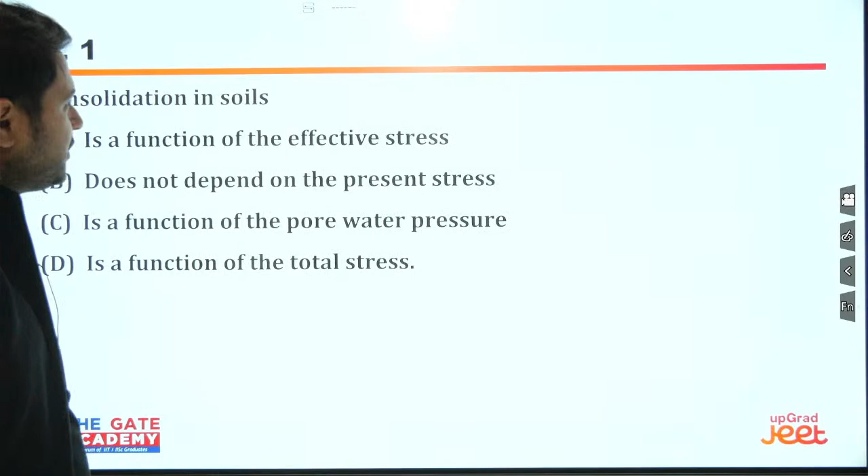Okay, let us enter into the first question of the day. Are you ready, everyone? So I'm going to start this right away. The first question of the day is on your screen now. Try to solve it, everyone.

Don't worry, I'll give you a solution for that also.

Today I'll be telling you which questions you should apply to improve your rank. After this question only, I'm going to tell you, so apply this question first.

Anyone with the answer? Islam, your answer is wrong. Pradyumna, very good. Vivek Raj, your answer is again wrong. Pradyumna was my student, I remember. Those who have studied the subject conceptually will be able to answer it very clearly. I mentioned these notes separately in your class notes. Anyways, who is it? Shri Nandana.

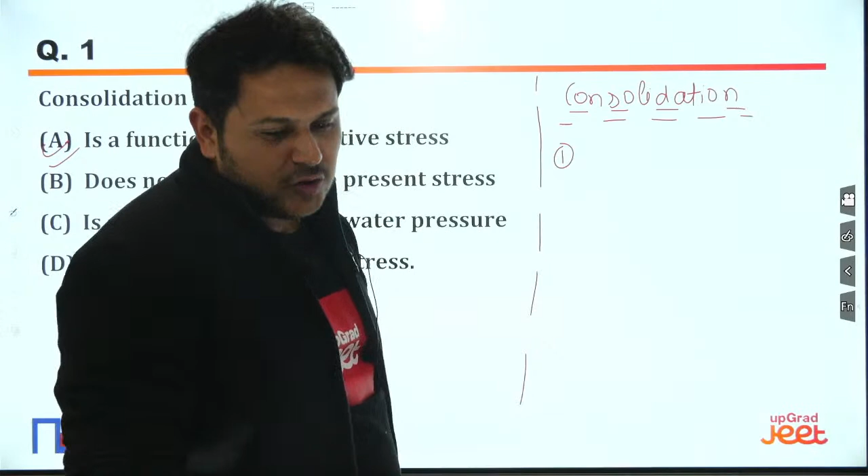Number one, consolidation is compression of the soil. Can I say that consolidation is the compression of soil? You people just type yes or no. If you agree with me, type yes. If you disagree, type no, and then I will explain that particular thing.

Very good. Now Chetu is typing that it is the reduction of weight. I can simply write that it is decrease in volume of soil. This is the second thing.

Now, what is the third thing? Compression of the soil, decrease in volume of the soil. And how is this decrease in volume of soil occurring? Escape of pore water.

But please mind my words. Each of these points is going to get converted into questions of different states, engineering services exams, or GATE. Every point is being asked as a question, so you have to be very serious while writing these points.

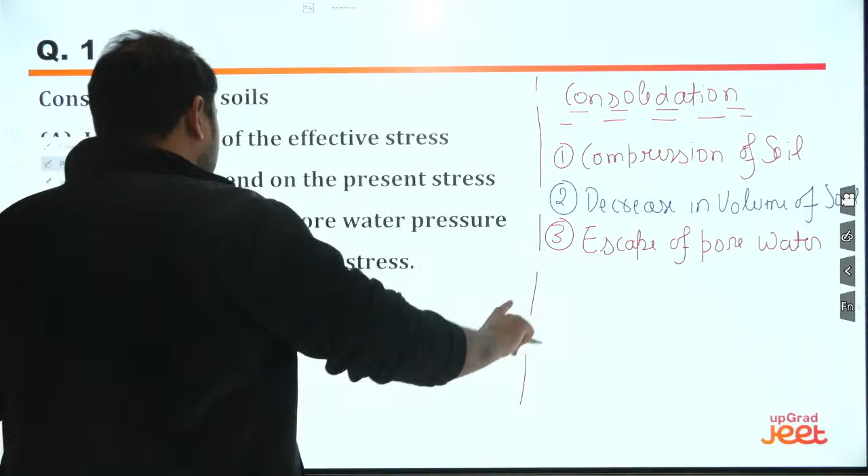Now fourth: if the pore water is escaped, will the effective stresses increase or decrease? The very first thing is, what is the meaning of effective stresses here? It is the stresses between the grains.

Stresses between the grains. Now, whatever are the stresses between the grains, if I have removed the pore water from it, will this effective stress increase or decrease? Tell me, everyone. This increases. So effective stresses increases.

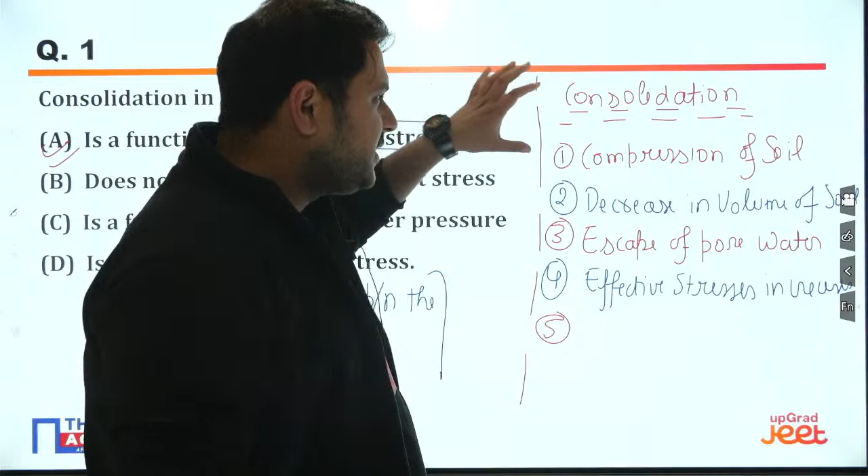So I can write here: effective stresses increases. Now if the effective stresses are increasing, what will happen next? The fifth point of consideration: compression of soil, decrease in volume, escape of pore water, effective stresses increases.

Now, this consolidation phenomena is nothing but a volume reduction phenomena. How is the volume reducing? Particles are coming close to each other. How? I'll tell you.

Suppose, please understand, these are the two particles. This is your one particle, this is your second particle. They were forming together the soil.

Earlier, the space between them, or the void between them, had the water. Once the water is eliminated, they will come close to each other. Why? Because the effective stresses have increased. Why? Because the pore water has escaped. Why? Because there is a decrease in the volume.

Decrease in volume automatically means that they are coming close to each other. Yes or no? Yes, sir. If they are coming close to each other, and if the effective stresses are increasing, from here let us see the options now.

Option one: consolidation in soils is a function of effective stresses. Number two: does not depend on the present stresses. It depends on the present stresses.

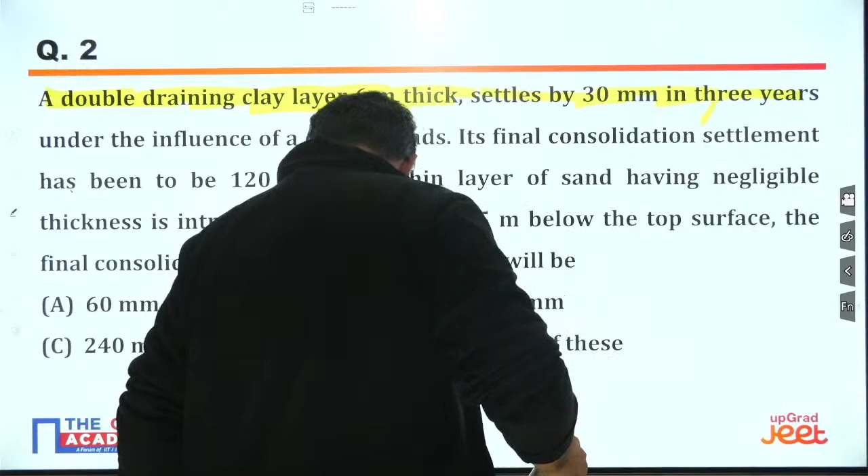A double draining clay layer, 6 meter thick - I will repeat it - settles by 30 mm in 3 years under the influence of a certain load. Its final consolidation settlement has been found to be 120 mm.

If a thin layer of sand having negligible thickness is introduced at a depth of 1.5 meter below the top surface, the final consolidation settlement of the clay layer will be? So this is the question. Anyone with the answer?

Anyone with the answer? Mayank, very good. Mayank has given the answer. Okay, very good Mayank, I appreciate that at least you tried it.

Now I'll give you an example of it. I'll make the diagram and explain it to you. Don't worry, I know some of you are beginners and need conceptual clarity. He is saying there is a clay layer of 6 meter thickness. This is case number 1.

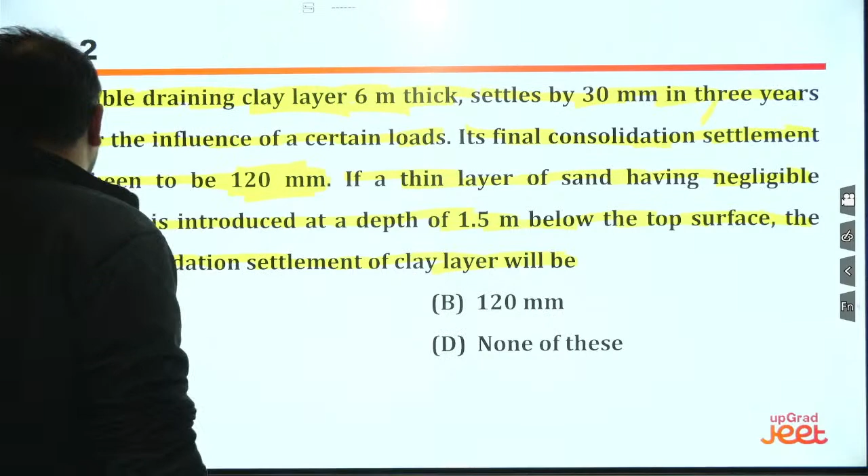In case number 2, what did he do? He introduced a thin layer of sand having negligible thickness at a depth of 1.5 meter. Now what will we do? We will take the same sample. Total was 6 meter, right?

After a depth of 1.5 meter, we introduced a very thin layer. Now what will be the depth left below it? This is going to be 6 minus 1.5, that is 4.5. Though this doesn't look like 4.5, you will have to assume this is 4.5 meter. Very good Pradyumna, very good.

So seeing the diagram, you are able to solve it now. Now please understand, I will give you one statement and things will be clear to you. The final consolidation settlement depends upon the total thickness.

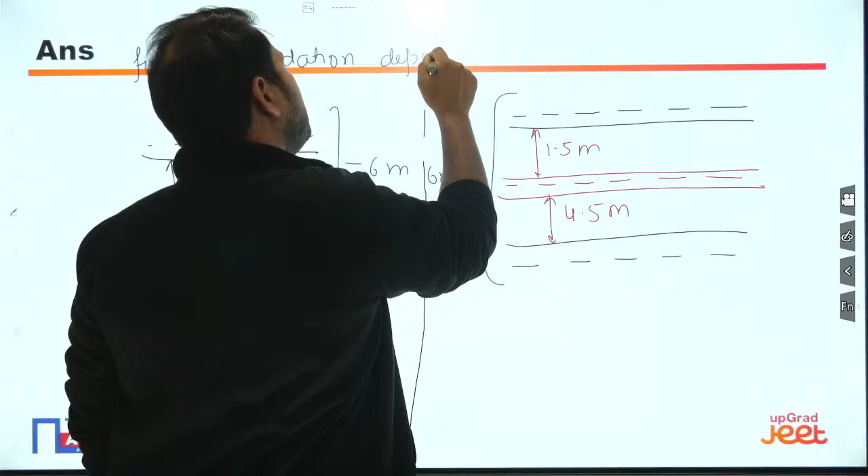Total thickness for this is 6 meter. The final consolidation settlement depends on total thickness. Now if we are inserting a negligible thickness layer in between, are we changing the total thickness? No, we are not changing the total thickness. Since we are not changing the total thickness, we are not changing the final consolidation settlement.

So the final consolidation settlement in this case was 120 mm. So in this case also, it will be 120 mm. So where is the answer? The answer is this only. Is it clear to everyone?

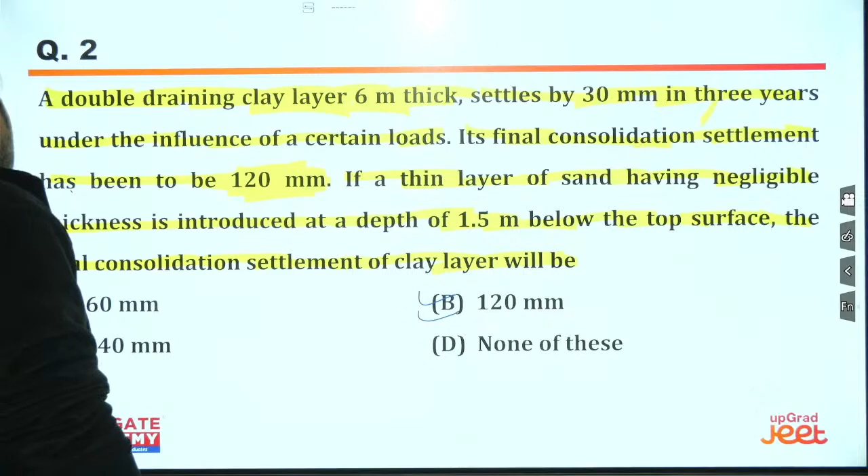Now let us discuss it more. What changes can we make to this question? He can ask you: which of these has more rate of getting drained? That means which of these two specimens will get drained quickly - the rate of drainage. So you will have to understand first how these two samples are different.

Thickness is same in both. So what is different here in these two samples? If the thickness is same, what is different? The difference here is in the drainage path. They differ from each other by the drainage path.

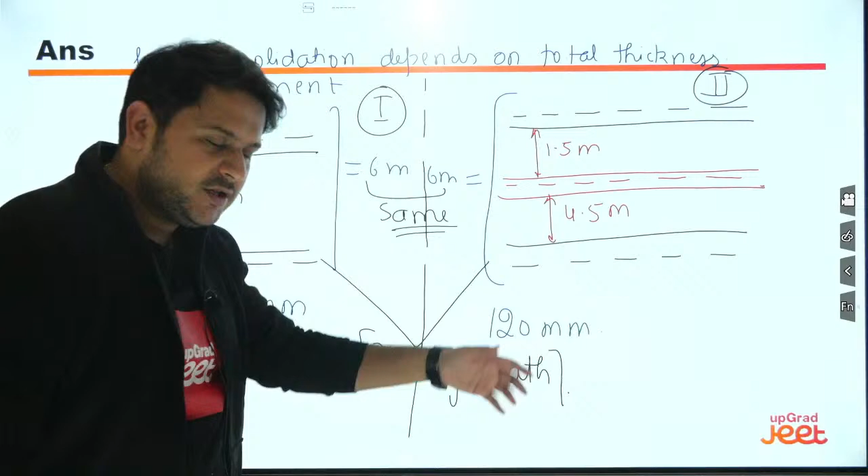Now you tell me, if this is your first specimen and this is your second specimen, which of the following has more drainage path? Please tell me, one or two? Very good, Islam, very good.

Which of them has more drainage path? Tell me. Very good, all of you. So it has more drainage path. Since the second has less drainage path, the rate of drainage is quick in the second one. Is that clear to everyone? Is this entire scenario clear to everyone?

Will you be able to apply such questions in the future, everyone? Tell me.

All right, very good. Now let us move to the question number 3 of the day. We have done 2 questions of the day.

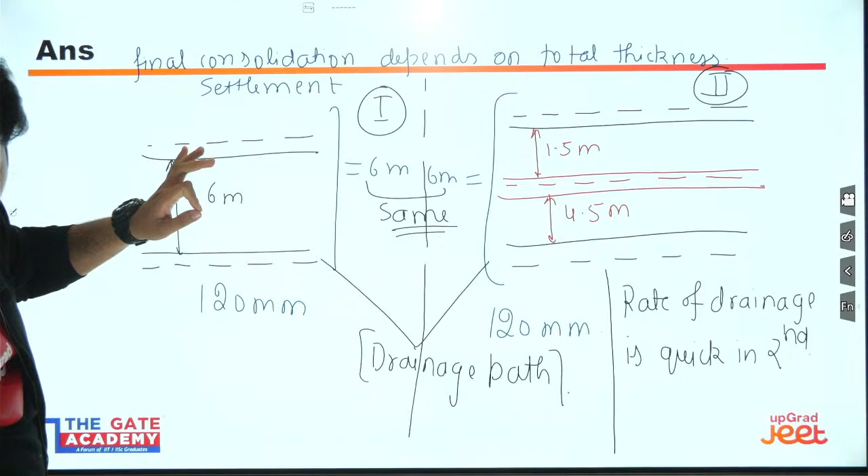Please ensure it. Nilesh Sahu wants to ask how many times. Nilesh, we will cover, and Pradyumna, for you also we have a different question. I have chosen the questions in such a way that we are starting from the beginning and the concepts will keep on piling up. So the next doubt or question will be covering all your doubts. I will suggest you people to have patience for the next few minutes so you will be able to understand whatever your doubts are. So let us enter into question number 3 and cover all your doubts.

Pradyumna and Sahu, all right Prachi. Just see the question number 3. This is the question number 3. Questions will be coming which will be covering your doubts. Bache, Nilesh, I have seen Johan, I have seen your doubt, and Islam, I remember your doubt also, bache. So let us keep moving because there is no point of wasting time here, since the same thing has to be covered in the future also, right?

Let us move to the next question. This is the next question. Please try to answer this question, everyone.

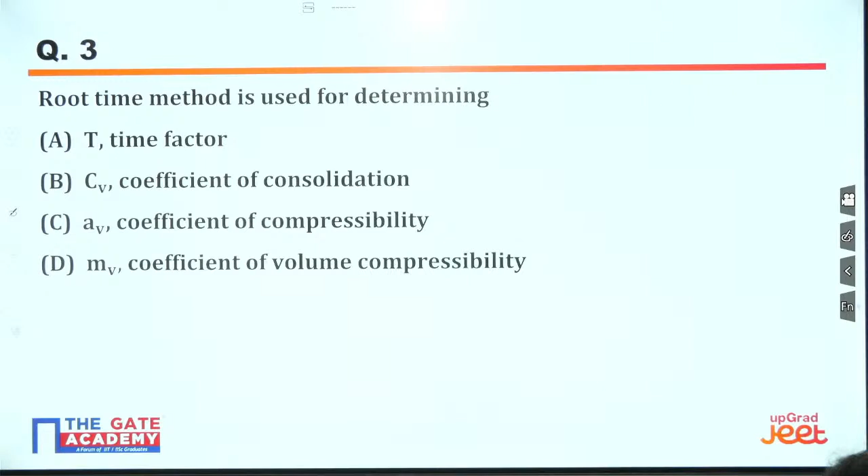All right, all right, all right. I have given enough time for this question. Now let us start answering this question, okay? What does it mean? I'm coming for it.

Very good. All of you have given the right answer, I guess. Now please answer: the curve fitting methods are used to find what? Which methods are used, curve fitting methods? I'll give some additional theory to you people, those who are beginners. Curve fitting methods are best suited, used to find the coefficient of consolidation, right?

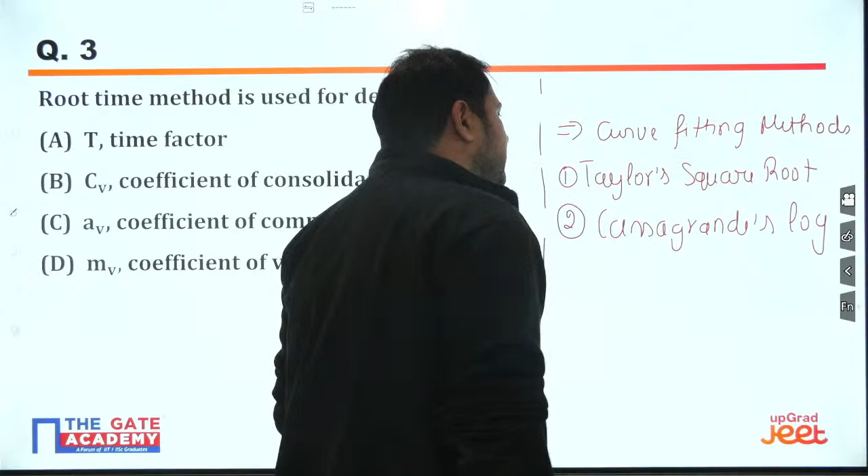They are used. What are the two curve fitting methods? Anyone? The two curve fitting methods are Taylor's square root of time method and the second method is Casagrande's logarithmic of time method. So these two are the curve fitting methods which are used for the consolidation coefficient, right?

Okay, shall we proceed to the next question, everyone? So what is the right answer to this question? All of you have given the right answer. This is just a basic question which everyone knows, okay? Now this is the answer.

See the next question, this is the next question. Please answer it very carefully, everyone. This is the most conceptual question. You should be answering it very quickly, everyone. All of you here, come on.

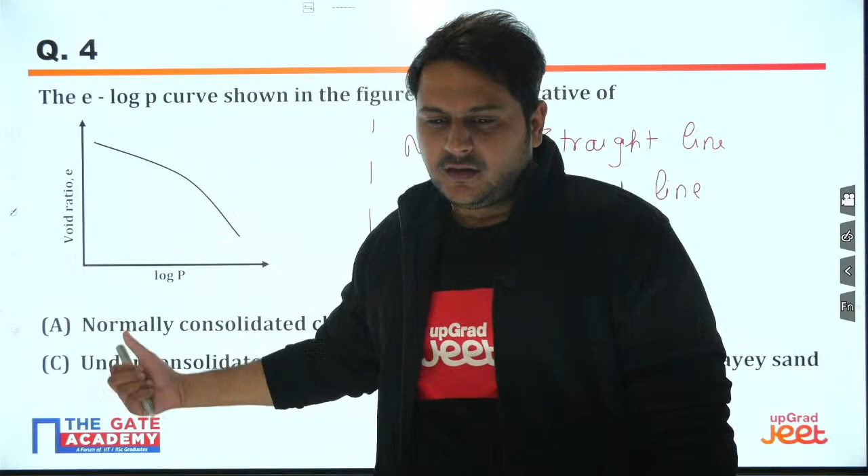Right, I'm starting it. Very good. See, if it is normally consolidated, there are two types of curves. I'll write here only. If it is a normally consolidated clay, it will be a straight line. If it is an over consolidated clay, it will be a curved line, it will be a curve. So this is the entire scenario of normally consolidated clay and over consolidated clay. So here this curve belongs to the over consolidated clay.

Clear? Let us move to the next question. This is the next question, tell me quickly. Take your time and tell me the answer.

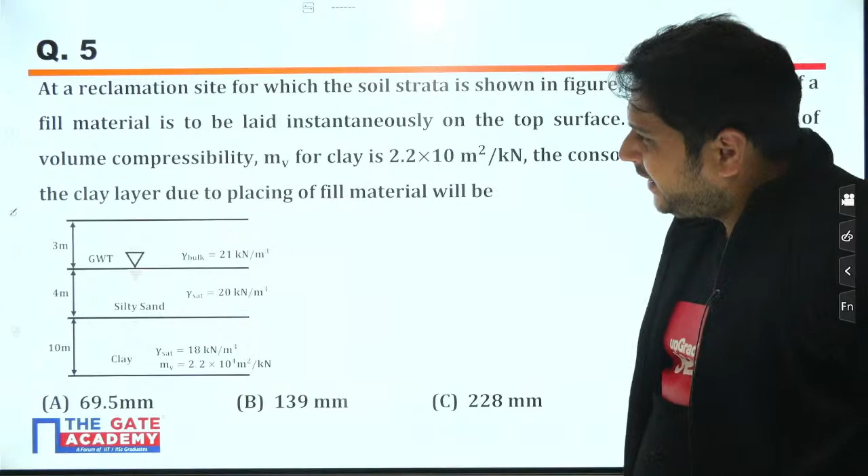Tell me something, everyone. This entire fill, we gave a name to this fill. Now this entire fill will act as what? We used a particular term for this. The fill will act like a surcharge.

Now, after giving this hint, I will just read the question for you once. At a reclamation site for which the soil strata is shown in the figure, a 3 meter thick layer of fill material is to be laid instantaneously on the top surface. If the coefficient of volume compressibility MV for clay is given, the consolidation settlement of the clay layer due to placing of filling material will be?

Now, what they have done, they have put this layer. This layer will act as what? This layer will act as a surcharge. So the fill material or fill weight will act like a surcharge.

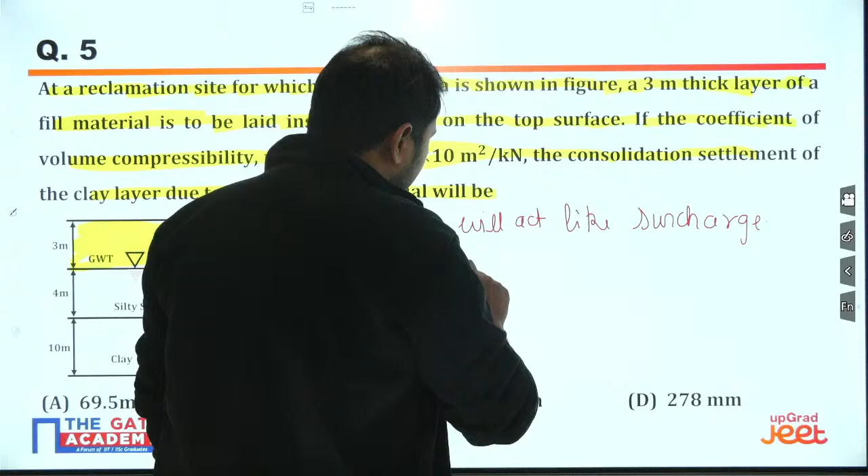So surcharge value Q will be equal to what? 3 meter into 21. So what is the value coming out to be? This value will come out to be 63 kilopascal.

63 kilopascal. Now the next step in this question, you have calculated the surcharge already. So what is he asking you? He is asking the consolidation settlement of the clay layer due to the placing of this fill material. So what would be the consolidation settlement of this clay layer?

So what is the formula to be used? We have to calculate the settlement. Now the settlement can be calculated by a very simple formula, that is MV into H into, there are just three parameters used for the calculation. What are the three parameters? Next is delta sigma should also be there. So put the values, all the values are given to you.

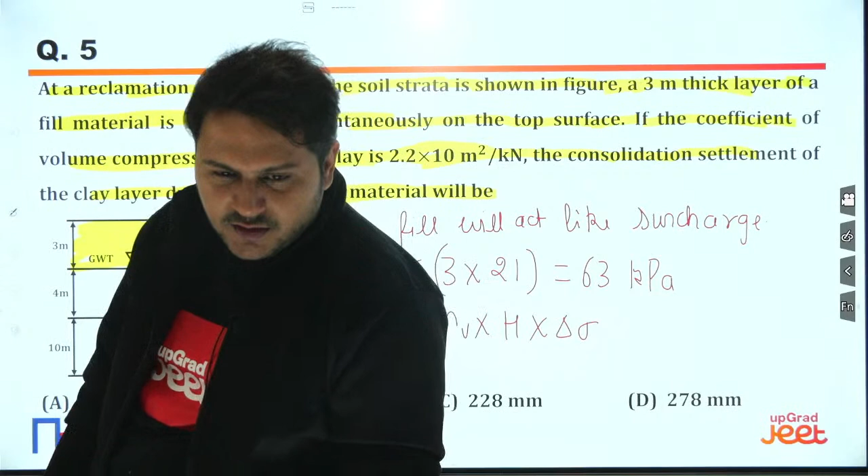Sir, senior section engineer exam... but I cannot comment on this. We are here to apply these questions for the GATE exam. So this session is dedicated for GATE. So just solve these questions.

So value of MV is 2.2. Units you can focus on, what are the units? So what is the value of H? Which H has to be considered? H naught has to be considered. So what is the value of H naught? Who's going to tell me? The value of H naught is 10. So this value of H naught is 10 into...

Now unit conversion also you have to take care of. Now this delta sigma has come out as 63, into 10 raised to power minus 4. What is the answer coming out to be? Tell me. You have written everything, all the data you have. So, very good Islam, this is going to be 10 only.

So this is 138.6 mm. Very good. So what is the nearest answer to 138.6 mm? The nearest answer is B. I hope this question is clear to everyone now.

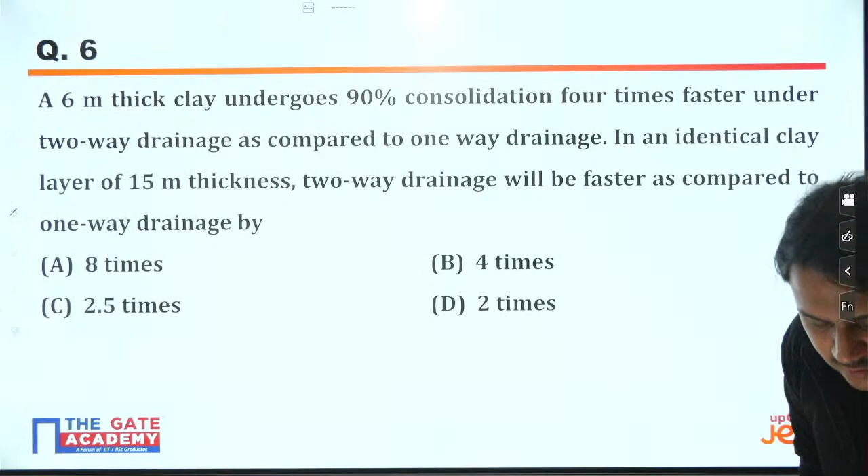Proceeding further, okay, the next question for you is this. Now, someone asked me how much time faster it is, if thickness is this, if thickness is that. Now this question will make the clarity over it. Whose doubt was it? Johan, you asked this doubt, Pradyumna, or someone else asked this doubt? So that doubt will be covered here.

No, Pradyumna, H naught will be the thickness whose consolidation is asked. The consolidation of this layer only has been asked. So what is the initial thickness in your words? If you want to call it the initial thickness, this is only the initial thickness, no? Or this is the thickness whose consolidation settlement has to be considered. So we will consider this only. I hope this is clear. See this everyone, solve this.

Someone asked me the doubt related to how much time it will take. I'll just tell you.

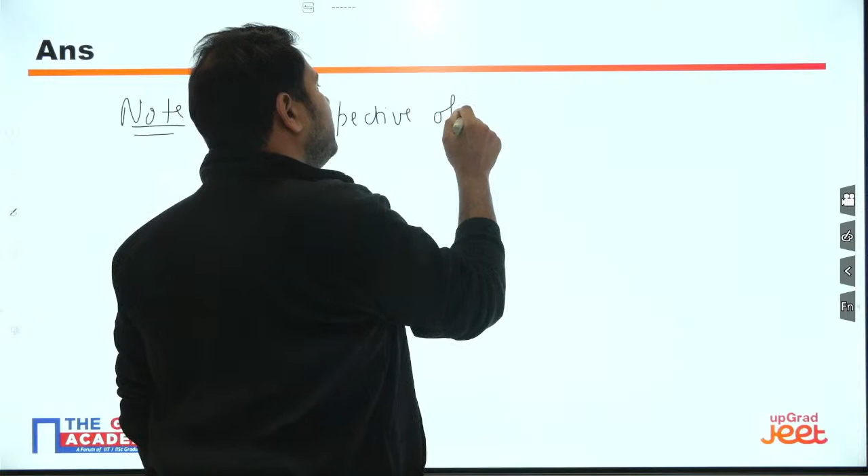What is the note? Irrespective of the thickness, the two-way drainage is always — how much times, who is going to tell me? — is always 4 times faster than one-way drainage.

Is it clear to you? Sahu, your doubt is covered. And everyone, now you can answer. What is the right answer to this question? The right answer to this question is B. You see this question? This is the question, and this is the right answer, and this is the explanation. Okay?

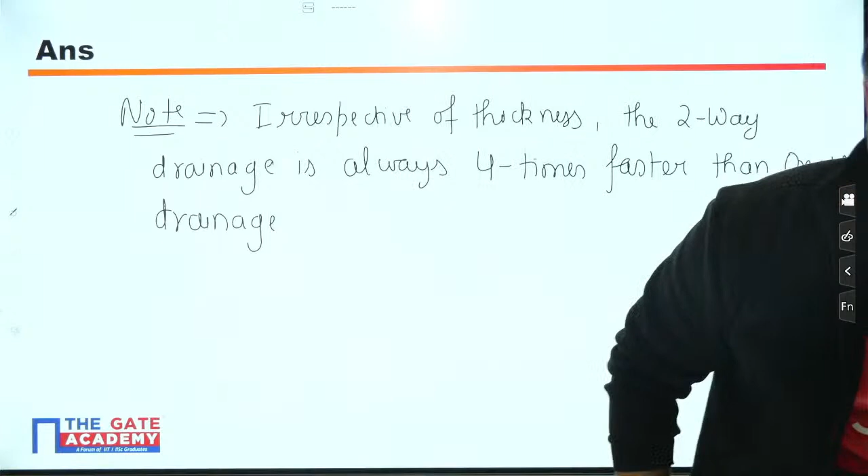Alright, everyone? Okay, coming back to the doubt of Mayank. I hope this is clear to everyone. This is the right answer, and this is the doubt what Mayank is asking, right?

Now, Mayank, let us read the question and then I'll take it out. At a reclamation site for which the soil strata is shown in the figure, a 3-meter thick layer of fill material is to be laid instantaneously on the top surface. If the coefficient of volume compressibility Mv for clay is this, the consolidation settlement of the clay layer will be what? So what you are asking is, sir, due to the instantaneous loading, delta sigma is 0.

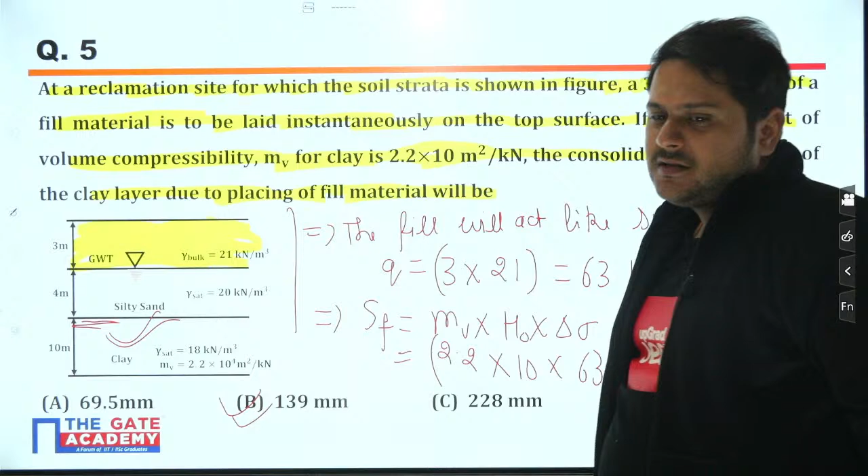Then I will tell you, man, we are considering this as a surcharge. This fill material is acting like a surcharge. Now, which case do you remember where water or surcharge was present over a layer and we considered the surcharge as 0? Do you remember any case? You should have seen the words very carefully. I said that this is acting like a surcharge. Now, this surcharge, whether it is laid instantaneously or gradually, we will never ignore its impact. This is why we have not considered it 0. Okay, man? Is it clear?

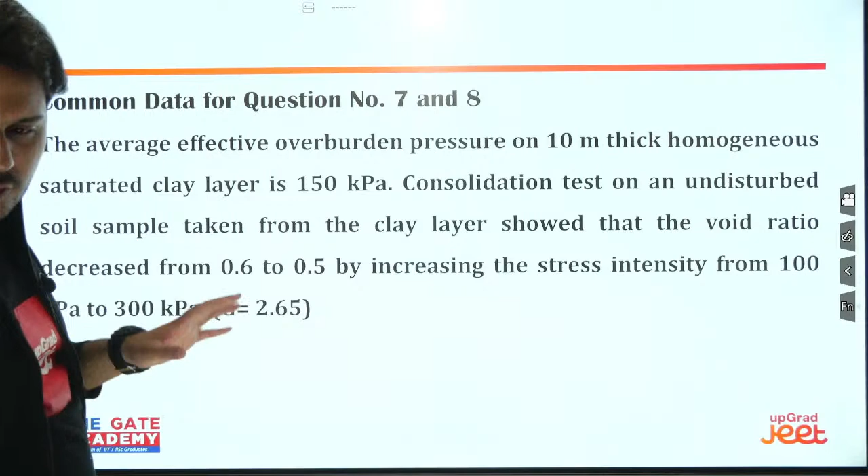Shall we proceed to the next question? All right, so we are proceeding to the next question, which is question number 7 of the day. This is a common data question.

Yes, Pradyumna, no need to see that again and again. Okay, you already have it, follow your notes, Pradyumna. I have given you the notes. Okay, Islam, yes sir, clear now. If water is present, then, Islam, you will consider what Mayank said. Okay, then you will consider for the instantaneous, we will consider this. Okay.

Now, please understand this, please understand this and solve this. Islam, solve this question, your doubts will be covered. You people just keep solving the questions and I'll clear your doubts. Okay.

See, this is what happens. Now, Mayank's doubt is clear, but it created doubt in other people's minds. Isn't it, Mayank? So this is what you wanted — you put a little worm in everyone's mind. And now you moved on. This is not good. Like Islam, solve it, I'll come back to this.

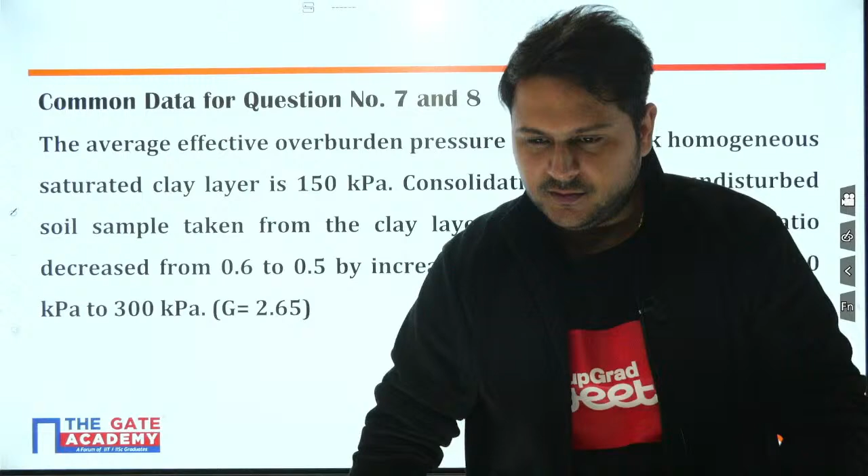This is the common data. Seen the data, now solve the question. This is the question: initial void ratio of the clay layer is — you have to calculate the initial void ratio of the clay layer, right, for this data. Initial void ratio of the clay layer. Solve it.

If you remember, we covered a few things on the log scale. Do you remember this? The log graph was considered for a few concepts. Do you remember this? All right, I'll just give you the graph first for this question. I know many of you will not be able to solve this, let me solve this for you. Let me read the question. The question says — all right, this is a common data question.

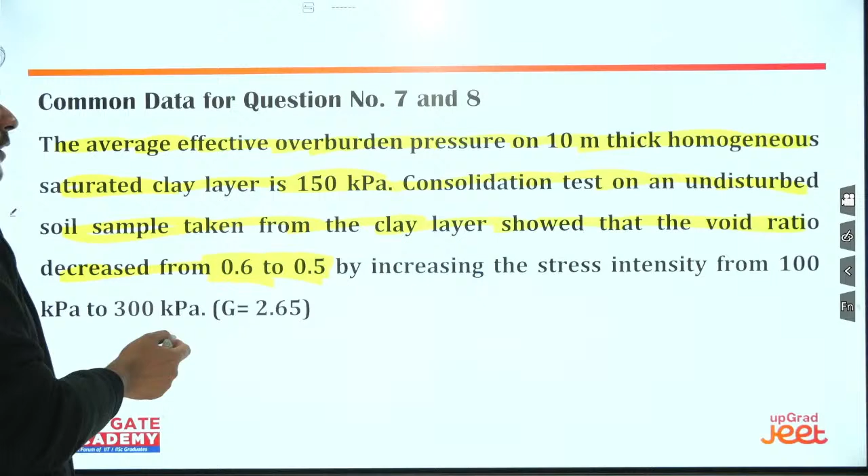I appreciate that all of you did this because I gave you the hint also. Now, by increasing the stress intensity from 100 to 300, G is this. What will be this is the data. Now, the initial void ratio of the clay layer is asked. So you have answered this as the correct answer.

I'll make a diagram for you people for the graph first and then we will start solving it. What does the graph say?

Suppose this is what we take on the y-axis. Who's going to tell me what we take on the y-axis? This is the value of E, and this is the value of log base 10 sigma dash. So we consider log base 10 sigma dash on the x-axis, right?

Now, what are the values under consideration here? Let me check. The first value under consideration, this is the curve, right? Suppose this is the curve. Now, what does this curve say?

This curve says that this value is this value. Now, this value is your 300, right? And the initial value, what we had was 100. Now, this is your 100, right? And this is your 300.

Now the values corresponding to it, the value of the void ratio corresponding to it, it's already given to you. What are the values given? The first value is 0.5. The second value is 0.6.

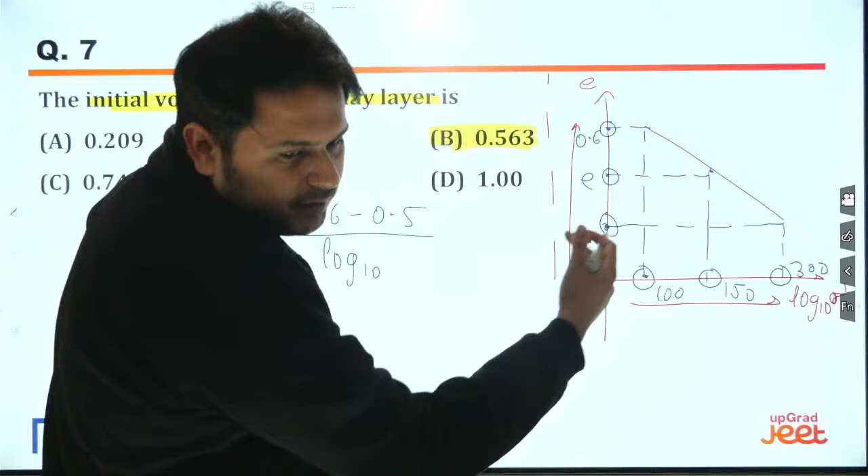upon log base 10 of, in the numerator what we take, the higher value or the lower value? We take the higher value, that is 300 divided by 100. So what is the value coming out of this CC? The value coming out of this is 0.21.

0.21. Now, what is the other formula? This is a very popular and very easy concept, so no need to worry that I'm doing some rocket science. There is no rocket science. This is a very basic formula. Now this is equal to

0.21. We have the value of this, right? If we have the value of this, what it will be? This will be E minus 0.5. Now what will be the value?

Log base 10 - in the numerator, what will we have this time? We will again have 300. In the denominator we will have 150 this time. So what is the value of E coming out? The value of E will come out to be, who's going to tell me? It will be somewhere between 0.5 and 0.6. This will be 0.563. Now, this is something which you can solve conceptually.

This is what we have solved conceptually, right? Talking about solving it without making any calculations. How can you solve it without making any calculations? When you see this graph, understand this.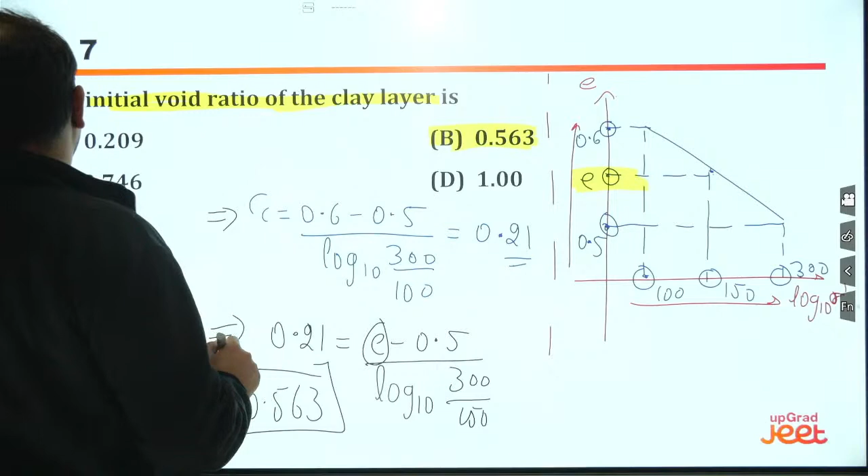Why? Because this value has to be between 0.5 and 0.6. But if interpolation is fine - Pradyumna, forget about interpolation, this is just a trick, right? Now, can this value be lesser than 0.5? No. If you are interpolating a value between 0.6 and 0.5, this value cannot be that either, cannot be this also. So what is the value left? Is this clear to you? But this is a trick, and as tricks are not always applicable, this is also not always applicable.

Shall I show you the next question on this data? Alright, see the next question on this data.

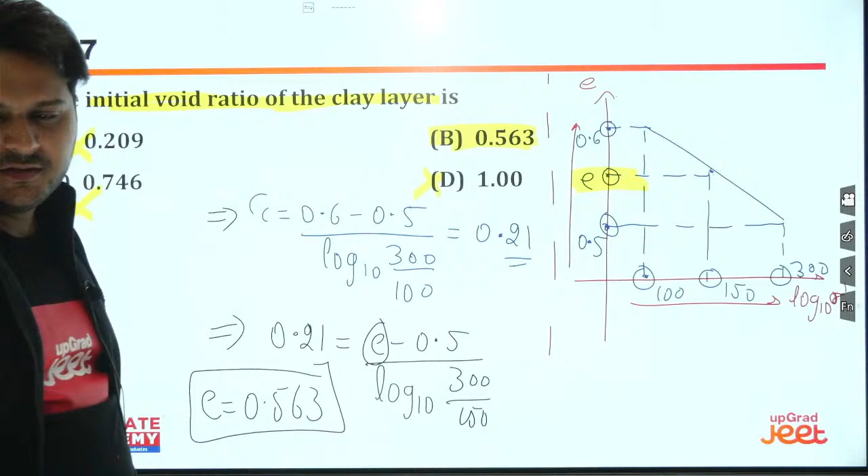You have to calculate the total consolidation settlement of the clay layer due to the construction of a structure imposing an additional stress intensity of this. Now you will have to calculate the total consolidation settlement of the clay layer using this data. Solve it.

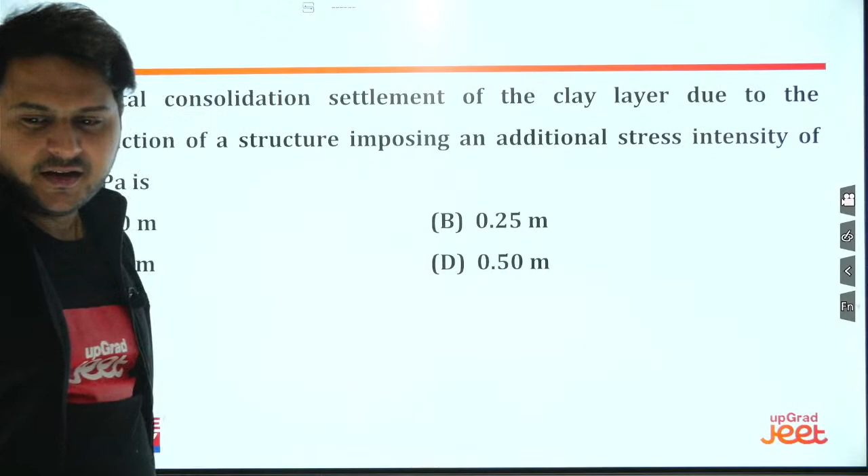See, I'll just tell you what formula is to be used here. Islam has given exactly the right answer. Okay, now let us start solving it. I will solve it here only, no need to take an extra page or something.

I'll just write the formula here. You already have all the data, so what are we supposed to calculate? We are supposed to calculate the settlement now. So this SF is going to be H naught. You can just see the formula: SF is equal to H naught into CC upon 1 plus E naught. Now you have all these parameters.

E naught, we will be using the E naught. You have all these parameters. Now what will we be using? We will be using log base 10. See, on the log scale, we use the stresses. So it will be sigma dash naught plus delta sigma upon sigma dash naught.

Now do I tell you what these values are? Just write these values, I'll write the values also. What are the values? The value of E naught is, this is what will be calculated, 0.563. What is the value of H naught?

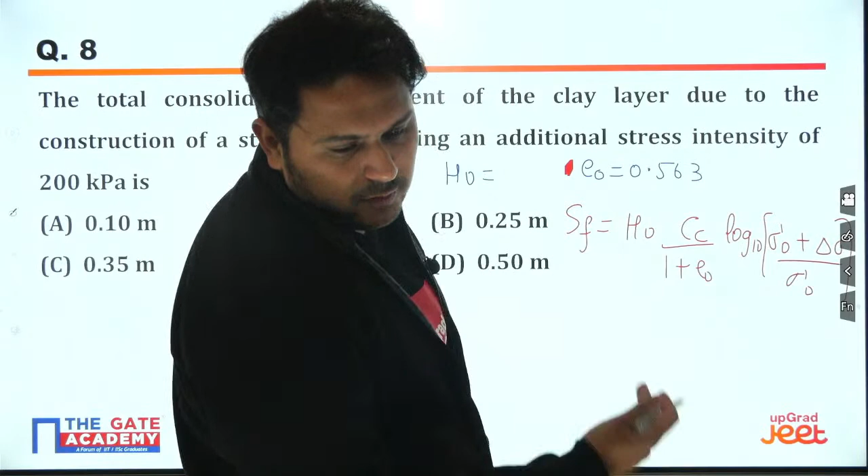What is the value of H naught from the previous data? Those who have solved it are going to tell me. This is 10 meter. Now what is the value of sigma dash naught? This is the value corresponding to the E naught. So this is your 150.

What is the value of delta sigma? Who is going to tell me? So here delta sigma dash is here. Which value did we choose? So this value was 200, the additional value. You have all the data now, solve it.

You have all the data now, solve it. Since you have all the data, get me the answer. What is the right answer for this question? When you put all the values, you will get D as the right answer. Is it clear to everyone?

Shall we proceed to the next question everyone? Okay, see the next question. Just a simple formula-based question it was. This is question number 9 of the day.

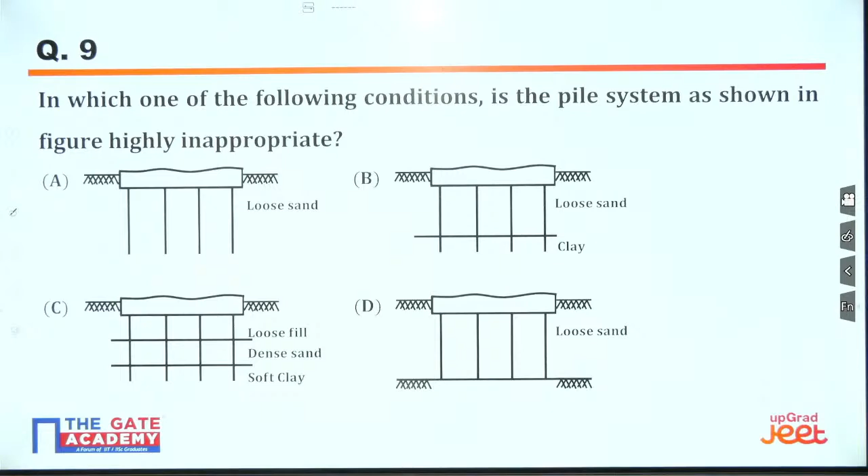So just solve this. This question is from the pile foundation topic. I'm writing it here. See, this subject is a bigger subject, right?

With this limited time, you asked me to cover two topics today. One was consolidation and second is pile foundation. Consolidation I have already covered. Now this topic is your...

What about others who are not able to answer it? Okay, what is the question?

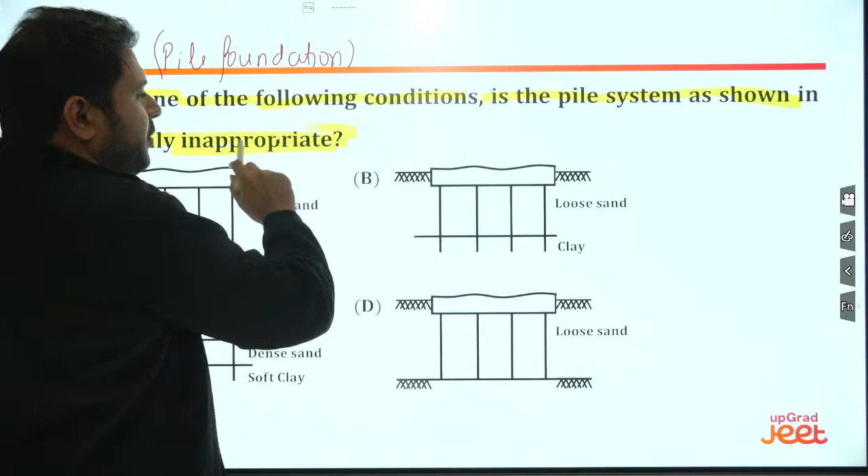Just see this. The question says, in which of the following conditions is the pile system shown in the figure highly inappropriate? Can't you tell me this? This is the easiest question I can ask you for today. That means you do not know even the basic things about the pile foundation.

Please try to understand, forget about the skin friction. See, you just understand, I'll just tell you, and you will never forget pile from today.

A pile looks like this. This is a pile foundation, right? Over which the entire building is going to rest. The camera will show you more clearly now. Okay, listen to it now.

This is a pile, okay. Now, so this is a pile. What you can see at below the pile, what we have? We have a tip sort of surface.

Now this tip, please understand, you will rest this tip on a softer surface or on a rigid surface. You will rest this on a clayey surface or a dense surface. Tell me. Please understand, the pile rests on the bottom.

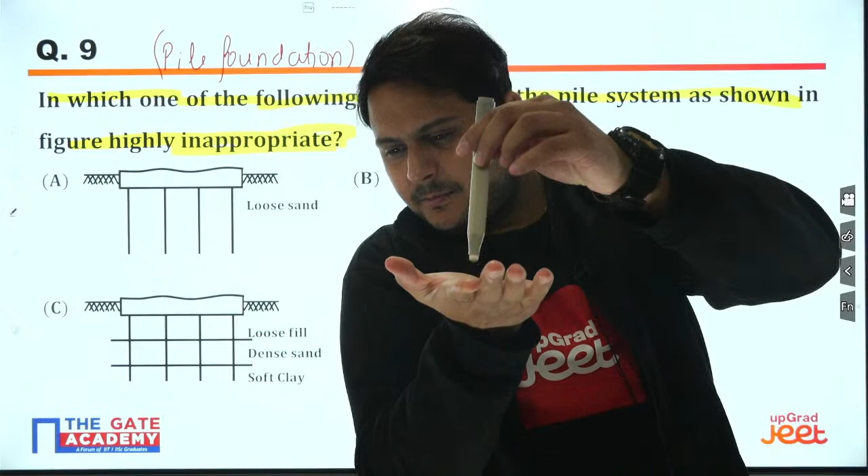This pile rests on the bottom, and all the loads of this pile are transferred at the bottom only. So where the final load is transferred, that place has to be very strong. Yes or no? So always in the pile foundation, the base has to be very strong. So you just see this.

If you consider all the systems here in this diagram, this pile is ending in a soft clay. If a pile is ending in a soft clay, the entire system is supposed to fail. Yes or no? Very good. So this is the most inappropriate system. Is this clear to everyone now?

Okay, we are proceeding to the next question. This is your next question. It is a true false question. So just solve it.

Now, how many of you know the bulb formation? How many of you know the bulb formation? Tell me everyone, waiting for your replies.

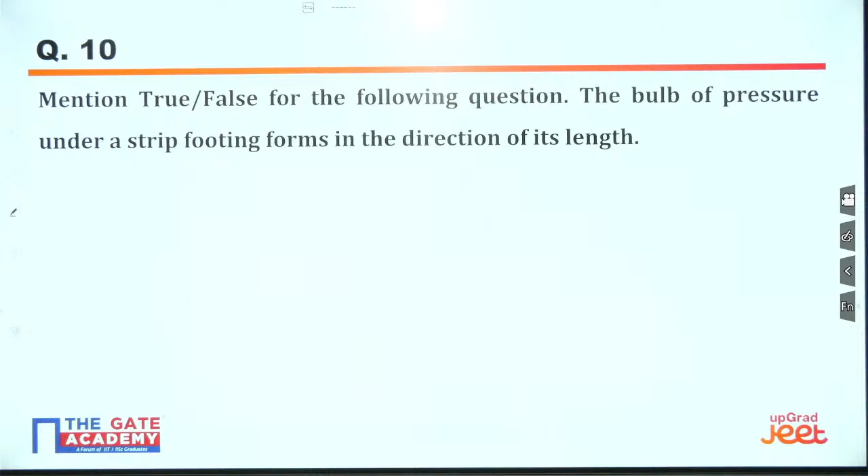Under-reamed piles? Okay, false. Please understand, this is false. See, the bulb of pressure under a strip footing, how it is shown? This is a strip footing. How many of you have seen this formation?

How many of you have seen this formation? A lot of you, almost all of you have seen this formation. Now, in this formation, the bulb is formed in the direction of width, not along the length. So you can simply write here: bulb forms in the direction of width and not along the length. Is it clear?

So what is the appropriate answer? The appropriate answer is already with you: false. Moving to the next question.

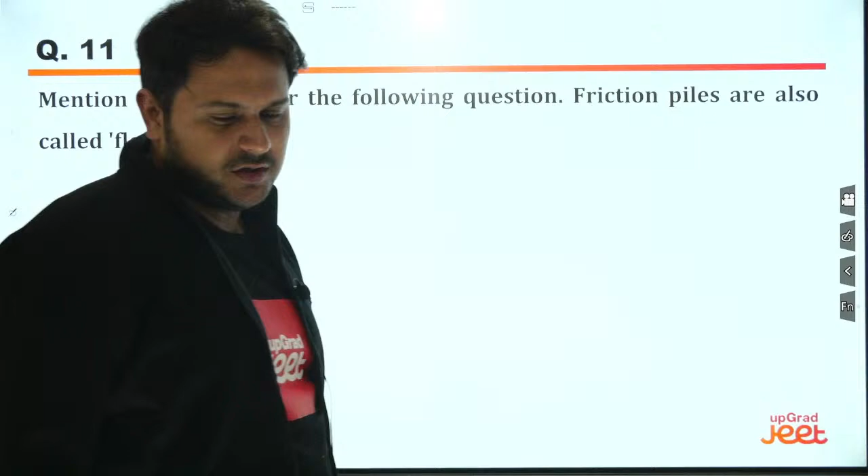This is the next question. Tell me the right answer, everyone. And I'll give you the right concept for it. Once you solve it, I'll give you the right answer for this.

Okay, please understand. Very good. Please understand, if you consider your piles, if you consider your pile footing, these piles are of two types. One is the end bearing, another is the friction piles. Now, for the end bearing, I did show you that it has to rest on a very good surface so that load is transferred there. But in the friction piles, the load is transferred along the skin of the pile, so this works as per the skin.

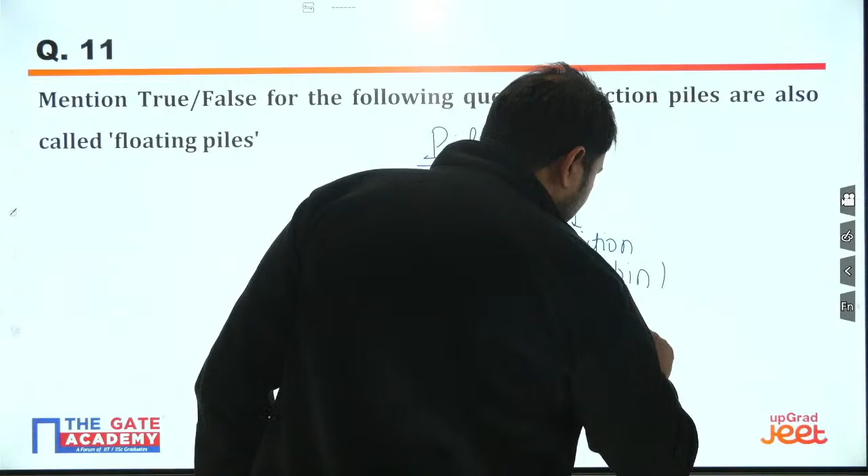Now, what is the question? For the following question, friction piles are also called floating piles. So even if they are not resting anywhere, these piles may transfer load by the skin, and they are also called floating piles. I hope this is clear to everyone now. So this is true, right?

I have explained this. Moving to question number 12 of the table. Please answer this question.

Very good, all of you.

So a negative skin friction occurs when the surrounding soil settles more than the pile. Why? Please understand, I'll write it here. If the surrounding soil settles more than the pile, it applies a negative drag, or a downward drag, leading to negative skin friction.

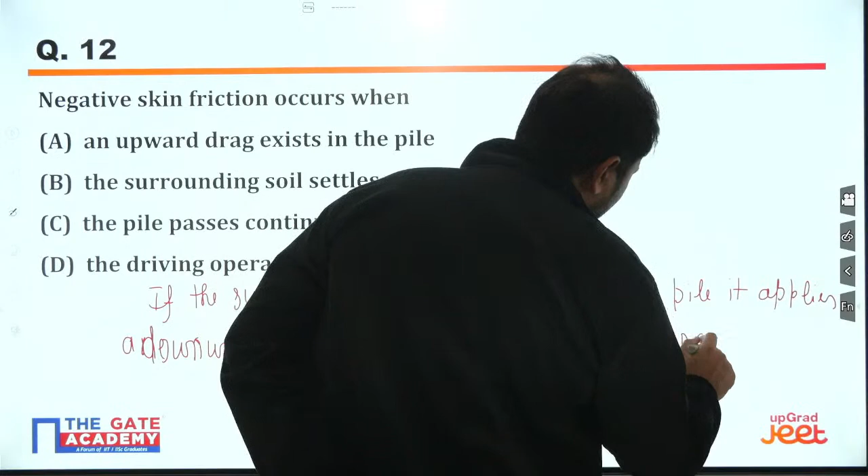So what is the right answer for this, everyone? The right answer for this is B. Please ensure environmental engineering is on the way, right? So check the dates for the environmental engineering of this core booster, and we will be discussing all the details of environmental engineering there.

Now let us proceed to the next question. That is question number 13 of the day. See this question number 13 and answer this.

What is the value of bearing capacity for cohesion, NC for piles, as per Meyerhof, taken as? Please answer this.

Please understand, they have asked for NC, so write down NC is equal to this. NC is equal to 9. This NC is equal to 9 for piles in the clay. For piles in the clays, if the piles are in the clays, we make NC equal to 9. So the right answer is C. Why did you answer this as 5.14? This is just to confuse you, this 5.14, okay?

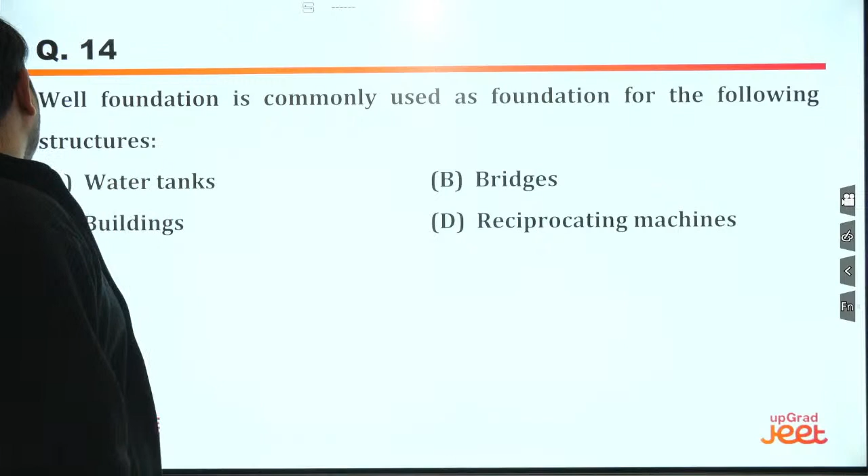Very good, Islam, very good. See, I'll tell you. Please understand. These well foundations can withstand scouring very easily. And since they can withstand scouring, and scouring is maximum in running water, wherever we have running water or in bridges, we can use the well foundation as the suitable foundation. Is it clear to you?

Shall we proceed to the next question? All right, so the next question is question number 15 of the day. This is the question: the group efficiency of the piles, the group efficiency of pile group.

Tell me everyone, you have to find the incorrect answer here. The incorrect answer here is D. This answer is incorrect. Rest all the things are matching to the group efficiency of pile group.

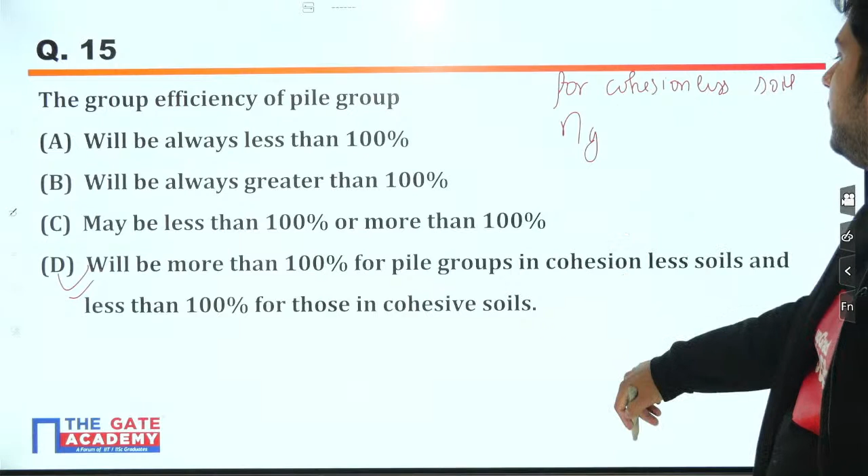Why? I'll tell you why this is the right answer. For cohesionless soil, I hope you can say this, the value of group efficiency ηg is less than 100%. And for cohesive soils, this value is greater than 100. So it is just given opposite in this option.

I'll explain, if you want me to. For cohesionless soil, this efficiency of the group is less than 100, and for cohesive soil, this is greater than 100. So this is why we are choosing this, because here it is given just the opposite of it. Will always be less than 100%. Who said this? Mayank. This can also be considered correct, or also considered wrong, but this is not 100% wrong, because if I consider the cohesionless soils only, then this becomes the correct statement. But this is always incorrect. So this question was more about choosing the most appropriate answer, or which answer is more wrong.

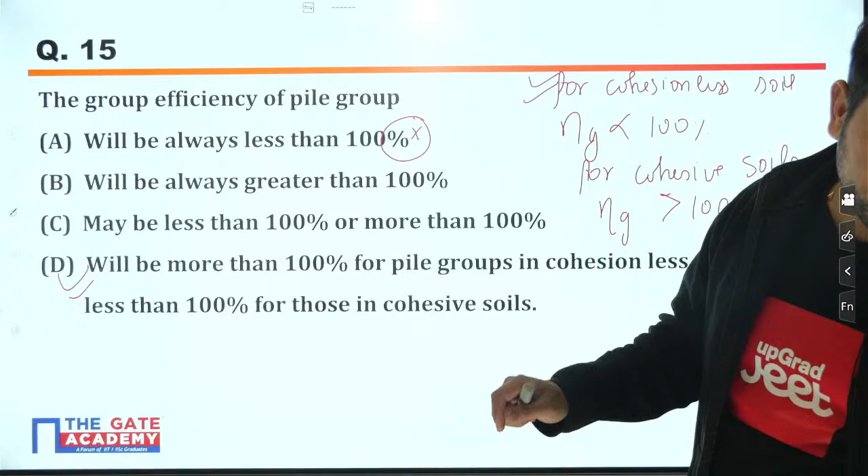So what is the right answer for this? You got this, everyone? You got this?

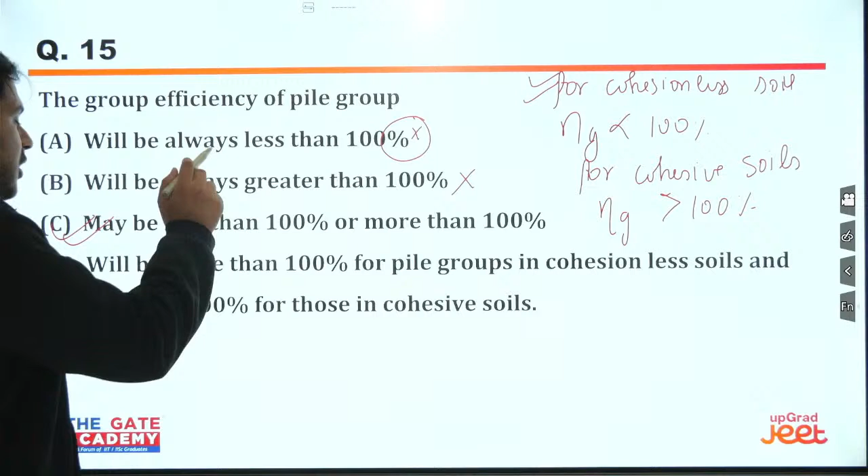This is one approach, but this was again a very contradictory answer. Now please try to understand this. Mayank, if you say that this is wrong, you should be saying that this is also wrong, because it will be always greater than 100, and this will also be wrong because it will be always less than 100. So the most appropriate answer for this particular question, which was in fact the contradictory answer at that time when it was asked, the right answer will become C, because all other statements are wrong. It may be less than 100, it may be more than 100, as we have seen, it may be less than 100 for cohesionless soils, it may be more than 100 for cohesive soils. Is that clear to you now?

Is it clear now? So yes, this question was very contradictory because they have not mentioned the type of soil here. If they mentioned the type of soil, this would have been another good question. But since it is not there, we were supposed to choose the most appropriate answer.

So what is the most appropriate? It may be less than 100, it may be more than 100. This is also wrong because this cannot always be the case. This is true but not always true. This is also true but also not always true. This is never true. So what is it? C is the right answer.

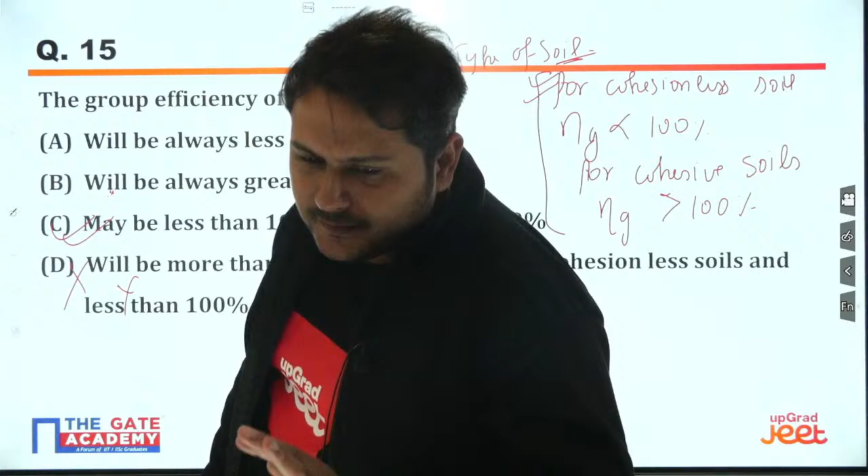Is it clear to everyone? Or should I explain it once again, or consider some more examples? But according to me, this should be clear now. I have covered all the parameters. Islam, is the explanation clear now? Yes, for design it will again depend on n number of parameters. We cannot always say, we cannot conclude it by one single parameter, right?

Okay, moving to question number 16. Tell me the question number 16, what is the right answer for this? Tell me, everyone. Who's going to tell me the answer of this?

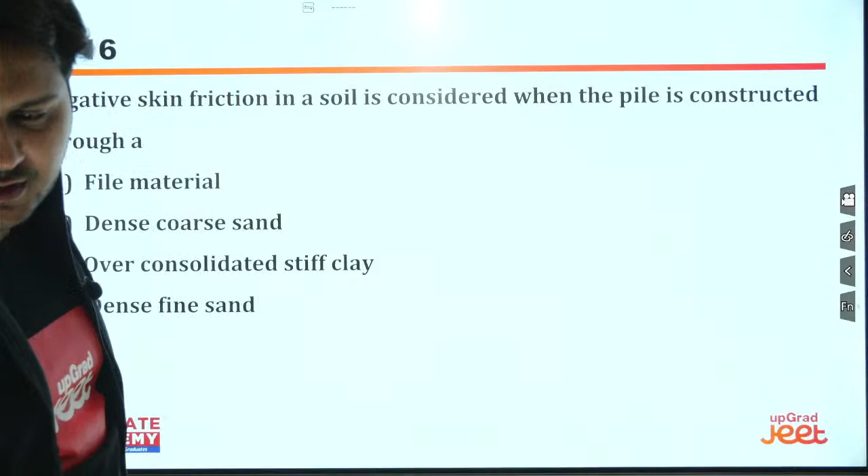The answer for this is, please understand, what happens in negative skin friction: suppose this is a pile, resisting the load with the help of the skin. What will happen if the sand or soil around this portion is recently filled, or is loose sand? This pile will not be able to resist the loads by the formation of bonds with it, and it will fall down. Once it falls down, the entire structure will fail.

So the most appropriate answer is recently filled material. This should be recently filled material, the more appropriate answer. Is it clear, everyone?

Now let us move to the next question, question number 17. Solve it, everyone. Again, a question from negative skin friction. Organic soil - yes, that may be the case in organic soil also.

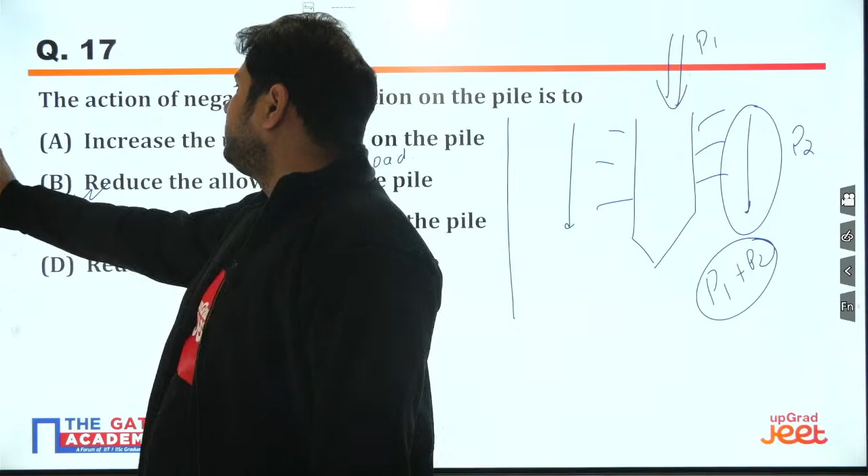Let us move to the next question. Is this one clear, I guess? All right, so this is question number 18 of the day. Solve it, everyone.

Yes, everyone. Tell me, everyone, you are going to tell me.

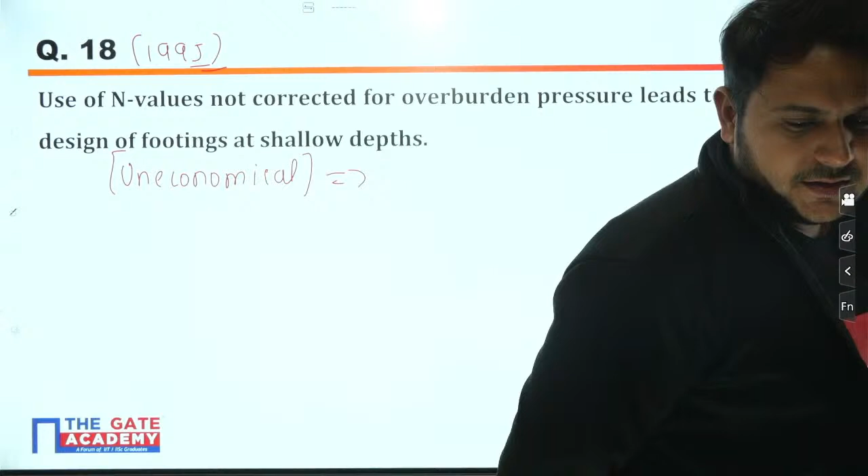Please try to understand - underestimated. Okay, that is also acceptable, but for now, please understand, uneconomical is the word I am using. Why? Because at shallow depth, the n value is underestimated. Very good, your answer is also right. At the shallow depths, as I have discussed in detail in the class, the n value is underestimated. So what happens if something is underestimated? It leads to the underestimation of the shear strength of the soil.

Underestimation also leads to the underestimation of shear strength of the soil. Now, if this is the case, what will happen? It results in an uneconomical design. So when you write 'underestimation,' we are not referring to underestimation of any specific value or the shear strength alone. If you write 'uneconomical,' it covers all other parameters. So the most appropriate word here should be uneconomical.

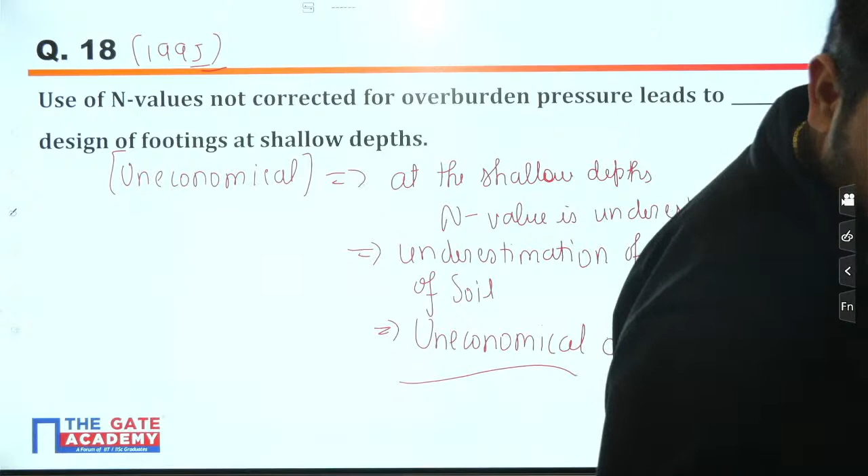Yes, clear sir. So the next question here is question number 19. The most commonly used sampler for obtaining a disturbed sample of soil is... tell me.

This is very common here, this is very easy. Not clear, sir? What happened, bache? Islam, tell me. Just type your doubt in the comment section and I'll tell you.

Islam, do you know what n value is? Just work on the n values and then I will come back to you. Type in the comment section what n value is and I will come back to this.

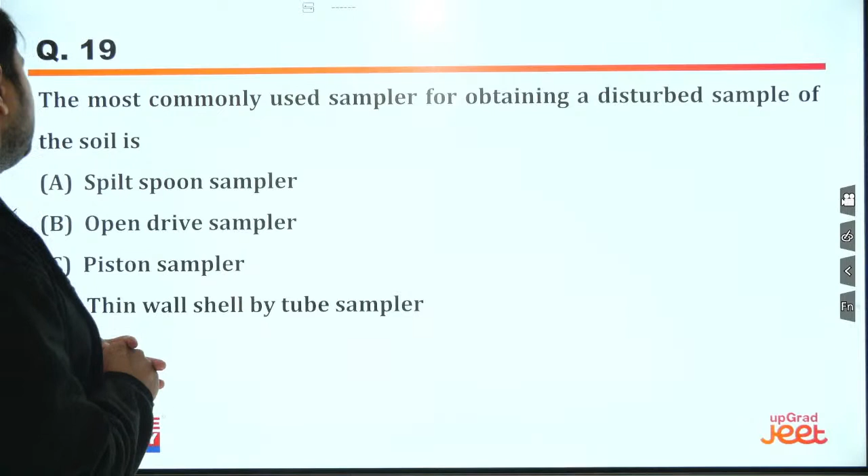The most commonly used sampler for obtaining a disturbed sample of the soil is your split spoon sampler, which is the most appropriate. So A is the most appropriate answer. Is this clear to you?

Let us move on. If this is the SPT number, Islam, and if you are considering it at shallow depths, that means we are underestimating it, right? If we are underestimating the value of n, we are actually underestimating the shear strength of the soil, which makes the design uneconomical. This is a straight relationship, which is discussed in the notes also.

Let us go back to the next question, question number 20. This is the maximum number of questions in a day we have applied, today - we have applied 19 questions already, and this is question number 20. So solve it, everyone, and then we will move to the next question. Try to solve it, and if you are not able to, I will explain it.

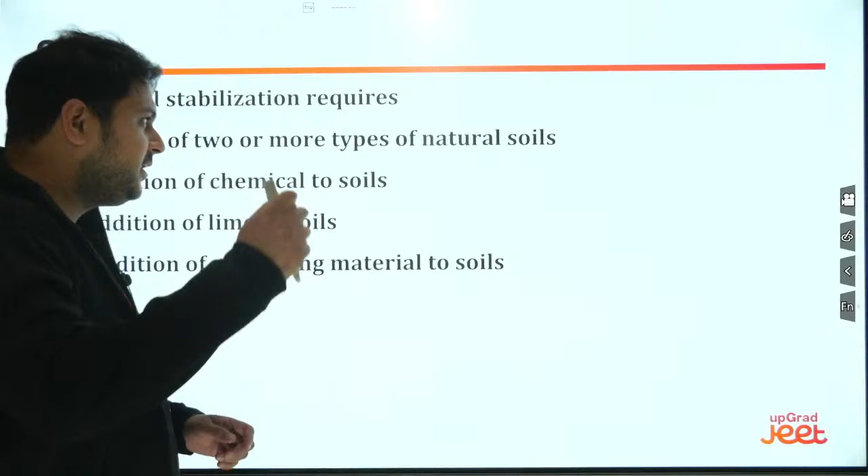Mechanical stabilization requires what? I'll tell you, mechanical stabilization is generally not known to students - it is the one in which no chemicals are added. Since no chemicals are added, we have to mix something naturally. Two soils are mixed for the purpose of stabilization. Now what will happen? I will give an example: sand is mixed with clay.

Now, is sand cohesionless or cohesive? Who is going to tell me - sand is cohesionless or cohesive? Now, if I'm mixing sand that is cohesionless with a cohesive soil for a particular purpose of stabilization, I call this process mechanical stabilization. So what is it? Mixing of two or more types of natural soils - not addition of chemicals, not addition of lime, not addition of cementing material. So this is your right answer.

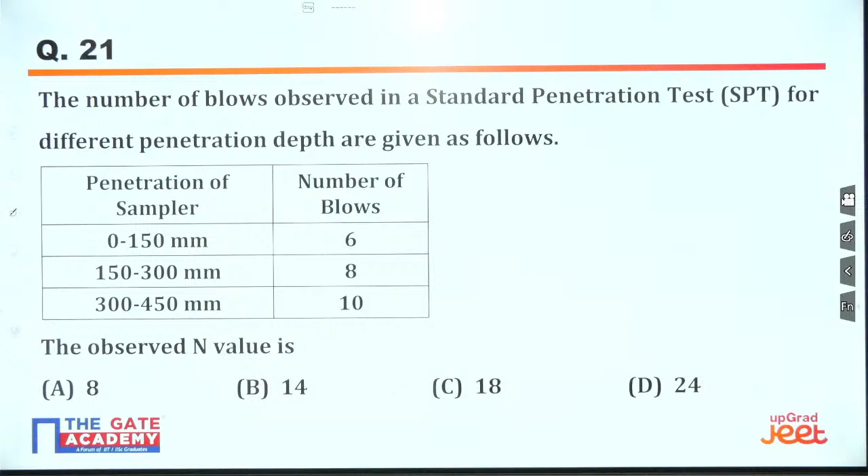Try to solve this question, everyone. Everyone is going to solve this. Very good, Pradyumna, your concepts are very good now. You have learned the notes very carefully, I guess.

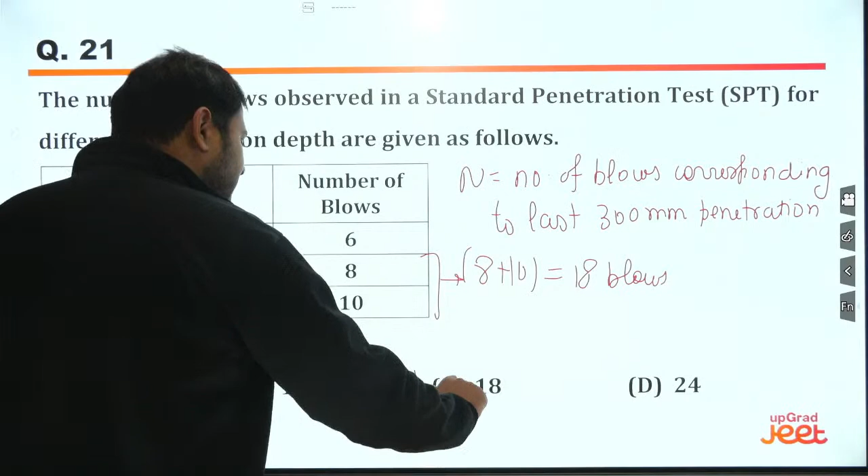All right, I'll solve it for you. The number of blows considered for N is actually the number of blows corresponding to the last 300 mm penetration. If you see the last 300 mm penetration, this gives you 150 mm and this gives you 150 mm. So what is the total number of blows? This is 8 plus 10, that is your 18 number of blows. So the right option is C. Is this clear to everyone?

Very good, very good, very good. Is it clear to everyone? Check. All right, everyone.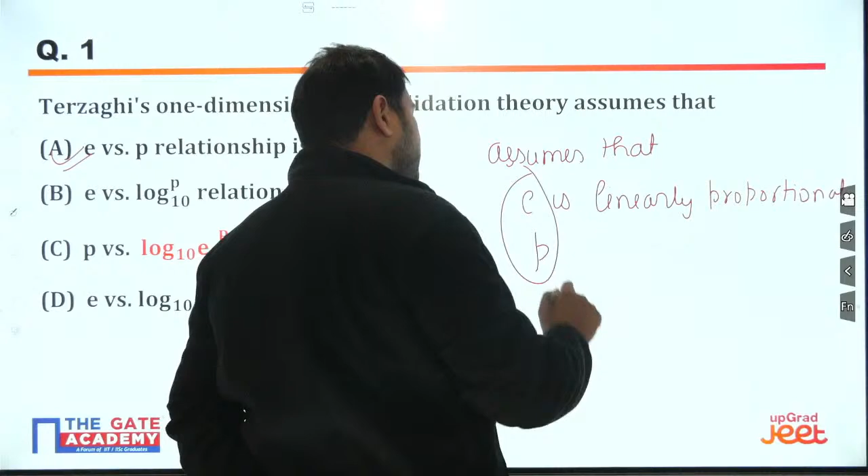Now I'll tell you something, all of you. Whenever I'm teaching the concepts here, there are chances that some of the parameters are unknown to you, some of the concepts are unknown to you. These classes are not meant to teach you the concepts in detail. Though I am covering everything in as much detail as possible, these classes are targeted for the revision of those students who have covered the syllabus till this date, because it's already December. So those students who have not covered the basics and miss a few concepts, it becomes their own individual duty to cover these concepts after the class. You go after the class and understand what is E, what is P, if sir mentioned this in class and you do not know. This becomes your own duty, because if I start explaining everything, this becomes a normal class, no longer a revision class. Since these are revision classes, there are certain parameters which I assume you already know. If this was the original class, I would not have assumed this.

All right everyone, so I'm moving to question number 2 of the day. In the live quiz, question number 2. Just try to answer this question, everyone. This is a good question, I'm telling you.

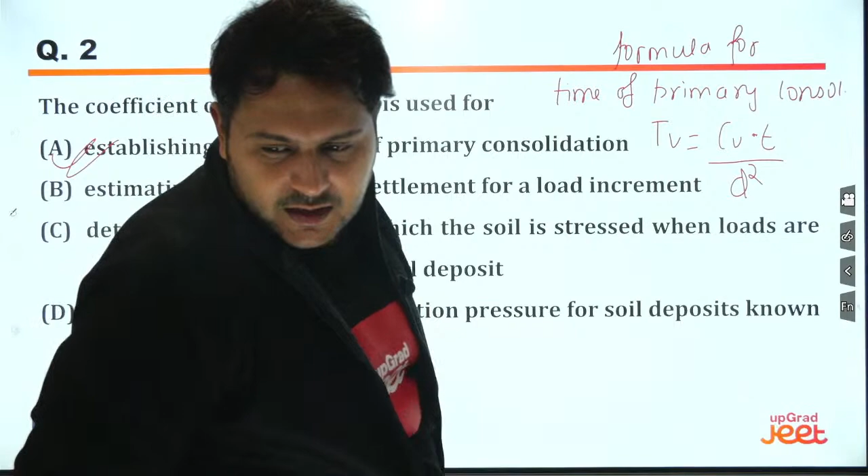Harsh, don't worry bache, I'll tell you in the last.

Okay, so moving to question number 3 of the day. Please see this question very carefully and answer this. Very good, Bhageshri and Pradyumna, very good. Those students who have given the formulas, they know almost everything.

Harsh, you know what bache, till the time everyone is answering this question, I'll just speak to you, Harsh Rathod. If we speak about the GATE now, if this was a university examination, I would have given you the exact topics as per your university that they will be asking these particular questions. But GATE is so unpredictable, it becomes really difficult to tell you exactly what are the important topics, right?

But yes, on the basis of the previous year papers analysis, we can tell that one topic, consolidation, GATE is asking so many questions from this.

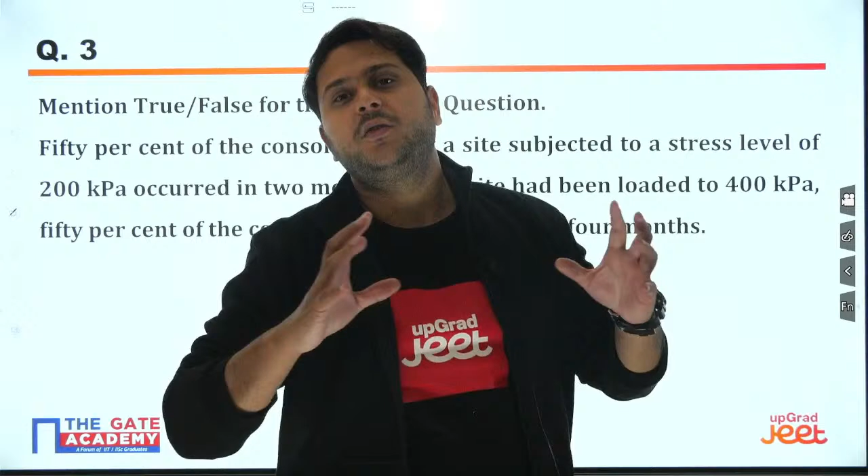The first topic, see Harsh, if you are a beginner, I'll just tell you, focus on the index properties and the first two chapters of this particular subject. If you focus on the first two subjects, till the index properties, you will be able to score at least 3 to 4 marks. And that is more than sufficient for someone who does not know anything.

But if you are at the intermediate level, then focus on the index properties, focus on the seepage analysis, focus on the consolidation, focus on the shear strength. If you do these 4 or 5 topics, you are through it. Getting it, Harsh? I hope I am able to convey things to you.

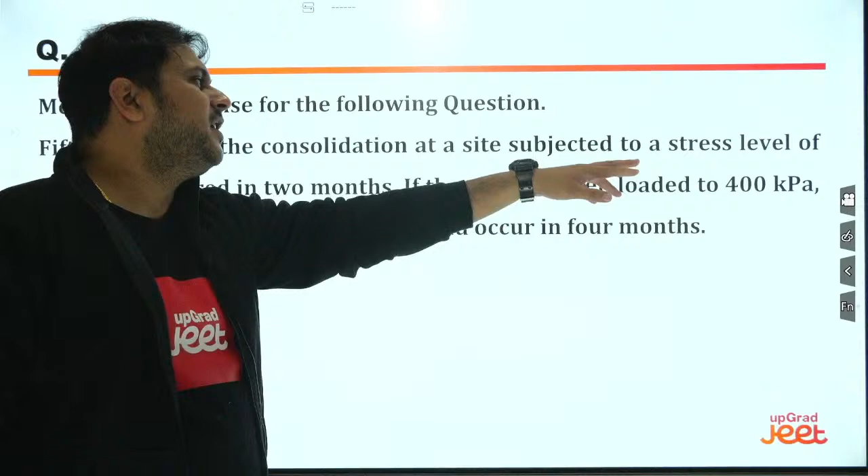Anyways, now coming to this for everyone. Since we have written the formula already, 50% of the consolidation at a site subjected to a stress level of this occurred in 2 months. If the site had been loaded to 400 kilopascal, 50% of the consolidation would occur in 4 months. Now, is this true or false?

Is this true or false? Who's going to tell me? See, please understand this is false.

Why? Because if I want to write this formula, we have written this formula already. This Tv can also be written as pi by 4, u square is equal to Cv into T upon D square. This formula can be written as this also, right?

So since this Cv upon D square remains same in the present case, we can say that T, the small t, is proportional to u square in this case.

Using this formula, can we say that T is proportional to u square? Now, if t is proportional to u square, what will happen? As u is given same, that is 50%, t also remains same.

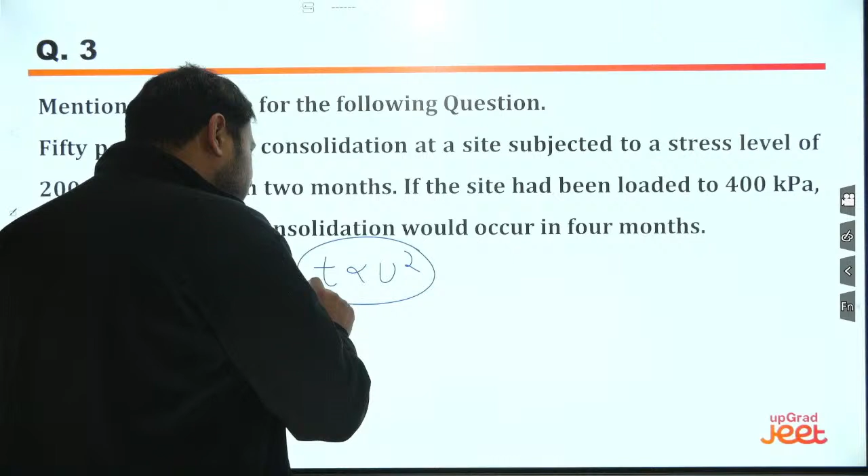U is given same, that is 50%, so t also remains same. I hope this question is clear to you now. Only that formula is used here also, that previous formula is used here also.

All right, moving forward to the next question. I hope this is clear to everyone, each and everyone out there. That is question number 4 for the day, live quiz questions.

Okay, solve this question. The slope of the, I'll show you the graph. Actually I have already shown you the graph. What is the value of Cc, coefficient of compression index? What is the value of Cc?

Do not check your notes, you will get it. Work on it yourself. Since I know you, if there was some random student on YouTube, I would have explained this. But since this is you, and I've explained it in the class, I'm going to be explaining it here.

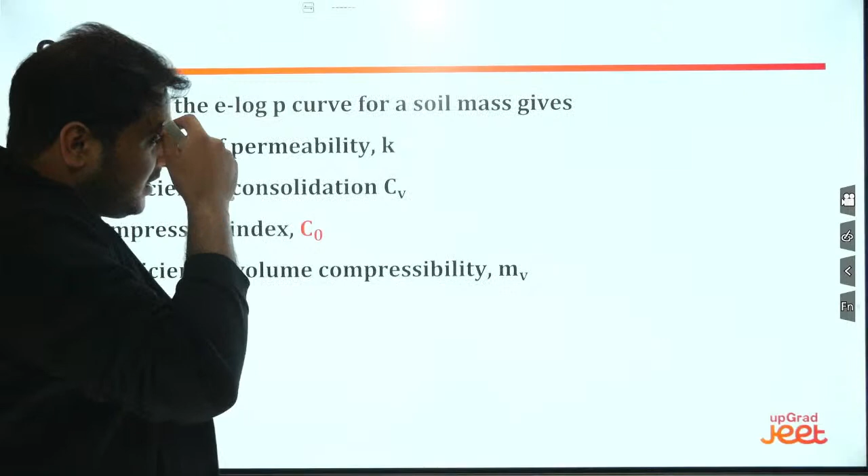Now, please try to understand this graph. Pradyumna, see this question. All of you know this graph. We have just discussed this graph. What were the values which we discussed?

We had the values E naught and EF. Suppose this is E naught, this is sigma dash naught. Here we have some value sigma dash F, and this is the value of EF.

You have seen this formula now, bache? We just made this. So what is the value of CC? The value of CC we just discussed. This was equal to E naught minus EF upon log base 10. This is always on the log base 10, on the log scale, right?

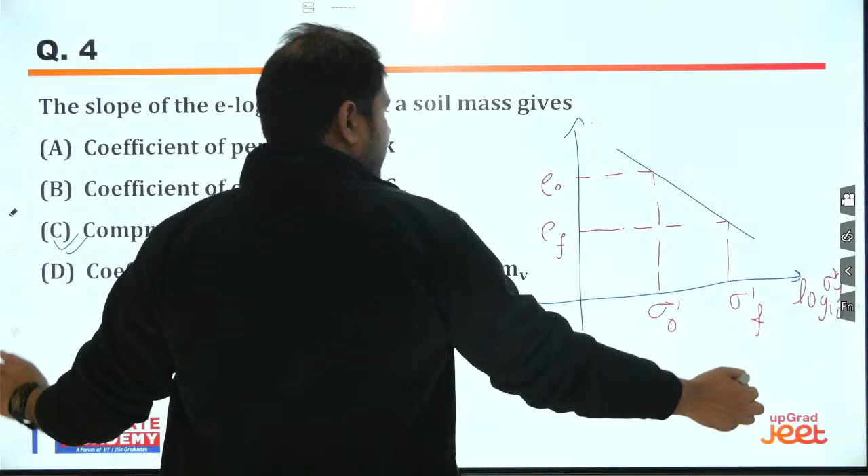So this is log base 10 of the sigma dash. So this F will not come. This is log base 10 of the sigma dash, and here what we have, this is E only. So this is log base 10 of sigma dash F upon sigma naught. This is the formula for CC.

If this is the formula for CC, the compression index, right? The slope of the E log P curve is giving you what? This is the E log P curve. What is this giving? This is giving you the CC, the coefficient of compression index. Is this clear to everyone?

All right, so I have given you the formula again. Let us enter into the last question of the day for the quiz. This is the last question. Solve it. Sand drains.

Tell me, if I want to write about the sand drains, before you answer this, I will write a few things about the sand drains. Now, what are sand drains? I will just write a few things about the sand drains. Alright, bache? Okay, then you can answer it.

First, understand these few things about the sand drains. The very first thing sand drains do is pre-consolidation of soil. They are used for pre-consolidation of soil. Now, what is the pre-consolidation of soil? In the process of pre-consolidation of soil, what will happen?

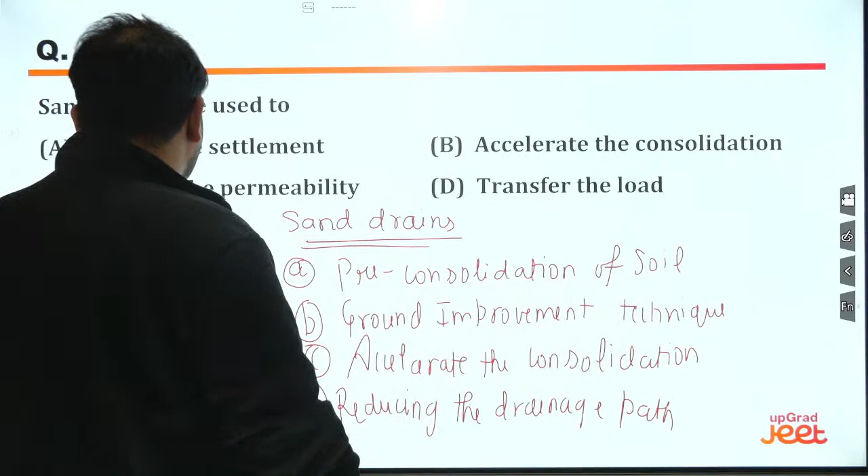The next step, they accelerate the consolidation. How do they accelerate the consolidation? They accelerate the consolidation by reducing the drainage path. By reducing the drainage path, they reduce the drainage path. If they are reducing the drainage path, they are also resulting in increasing the permeability.

Increasing the permeability, yes or no? So I'm not saying that this is wrong. I'm not saying that this is wrong. Whatever you have answered is right. So sand drains are doing all these purposes. They are increasing the permeability also.

But the more appropriate answer is what? They are accelerating the consolidation. The main purpose, see, you have to be very tricky while answering these questions. The main purpose of building the sand drains is to accelerate the consolidation, not to increase the permeability. The main purpose of sand drains is not to increase the permeability.

The main purpose is to accelerate the consolidation. Yes, though this acceleration is done by increasing the permeability only, but what is the purpose of building the sand drain? The purpose is accelerating the consolidation. I hope this is clear to everyone, that's why the right answer is B.

Yes, it is confusing, yes, it is given to confuse you only. This is also right, but the more appropriate answer is B. Why? I am explaining it for the third time. The sand drains are built not to increase the permeability but to accelerate the consolidation. Is that clear to you?

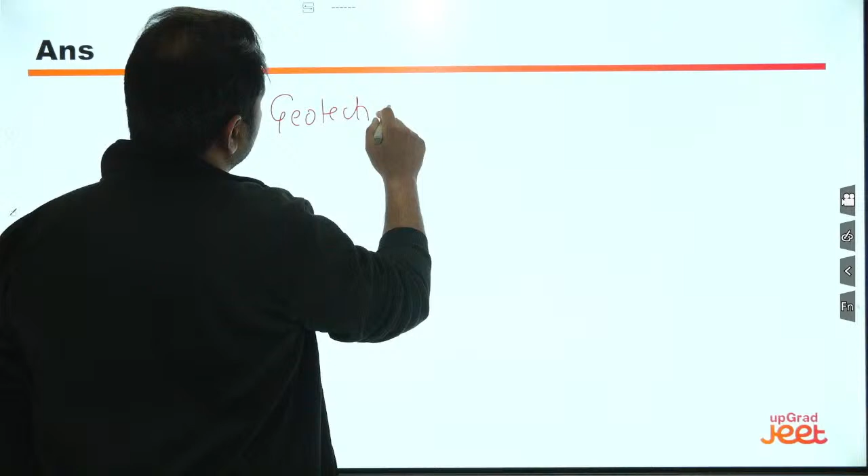Geotech is tricky but easy - contradictory statement. So geotech is a bit tricky but easy. Once you will be able to know all the concepts, you will be able to solve everything.

Second, trust your concepts. Whatever is with you, trust your concept. One or two answers may not match from the theory, one or two answers may be wrong. You have to trust your concept.

And at the last, all the best for this subject. We are left with the subjects of environment, surveying, and irrigation hydrology. But for now, this is it for this particular subject.

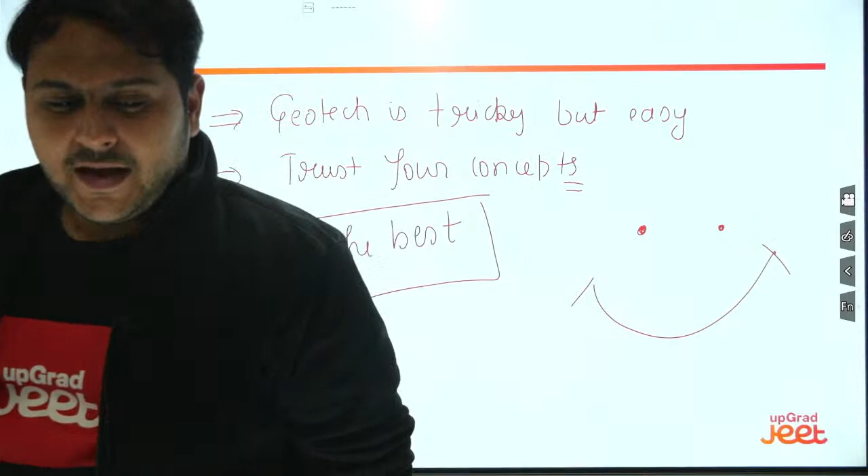All right bache, capacity and pressure are chapters in itself. Now capacity and pressure are the chapters in itself, right? So talking about capacity and pressure in the foundation in particular, we have covered all the rigid, flexible, and all those concepts in yesterday's class, dated 16th of December.

Alright, so if you want to see that, you can see that video. If you still face the problem, you can type it in the comment section, I'll give you the link of that particular video. Alright bache, so everyone, this is it for this particular session, right?

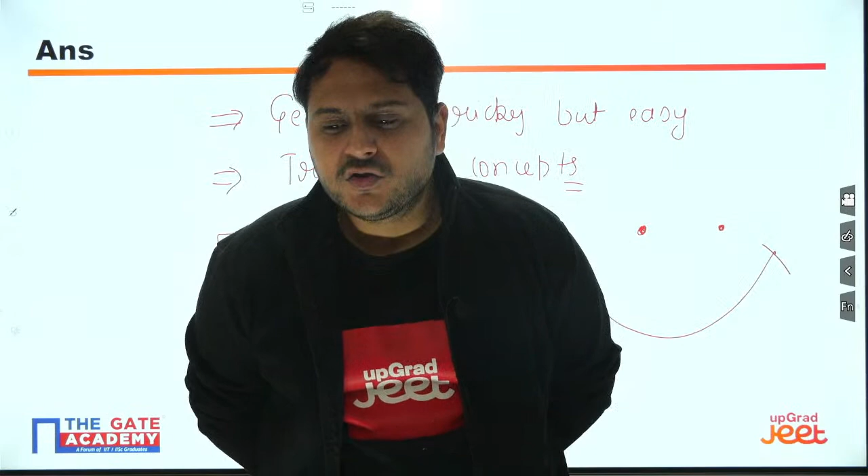Index properties - see, index properties is the soul of the soil. I have given you all the formulas separately talking about the soul of the soil, right? So index properties, consolidation, shear strength, seepage analysis - these are the topics which you need to focus, everyone.

All right everyone, all right. So this is it for this session everyone. God bless you all. I see it but it's not clear.

Bache, see, this time is bounding me. I wish I could explain the entire thing again. Do we have these slides? No, we do not have these slides. Anyways, but I'll still try to explain it to you, bache.

We had two types of footings. I gave the entire theory in yesterday's class. I don't know why you failed to understand this. Anyways, so you are talking about whether this is a flexible footing or this is a rigid footing. We covered this entirely yesterday.

So there are two things to be considered: one is the settlement and another is the pressure. This is what you want to ask, bache.

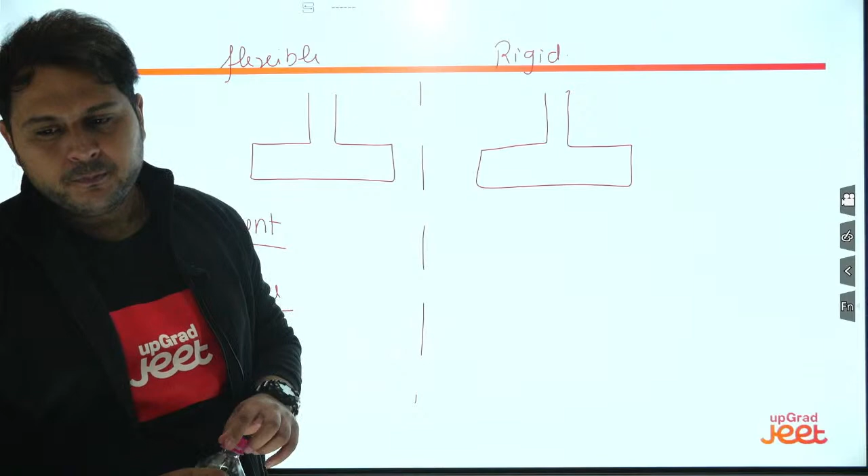Right? I have given you exactly all the things related to this in the previous class, right? Fine, so this is it for this session, everyone.